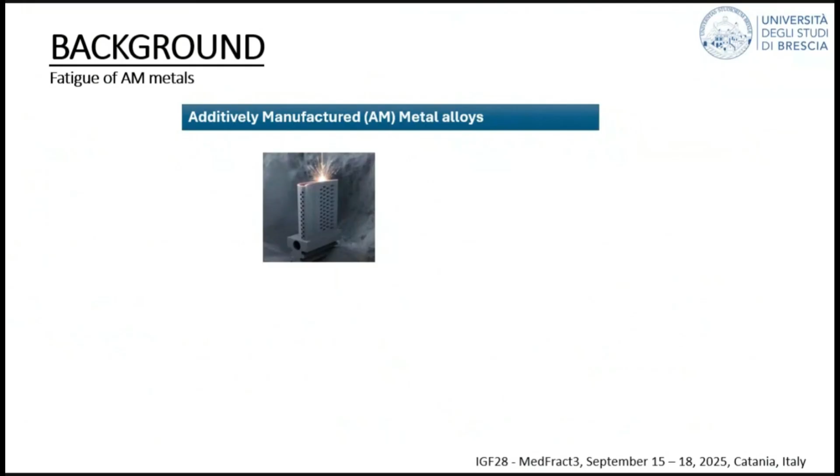The general scenario is that fatigue properties are a critical aspect for structural integrity in additive manufacturing. It depends on the combination of several factors like porosity, surface finish, microstructure, which in turn are dictated by technology. Each technology has a number of parameters that may affect defects, surface finish, and so on.

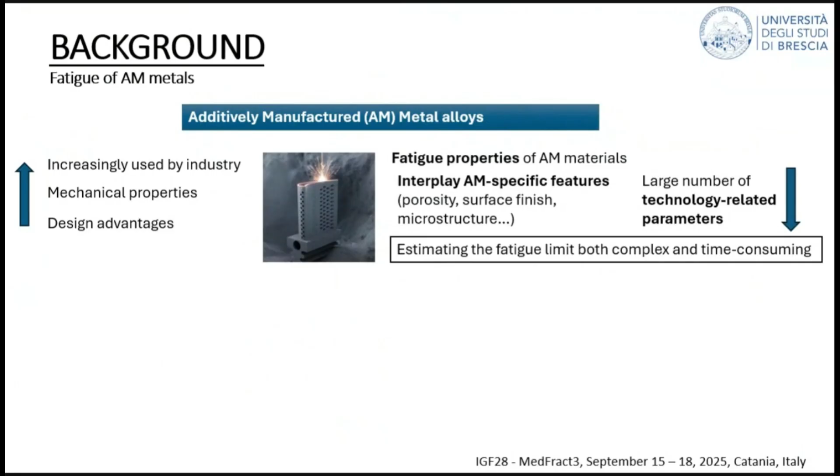In this scenario where we have many technologies, they are still evolving. That means that estimating in a robust way, for example, how parameters or an optimal configuration may affect fatigue can be quite challenging and time or price expensive.

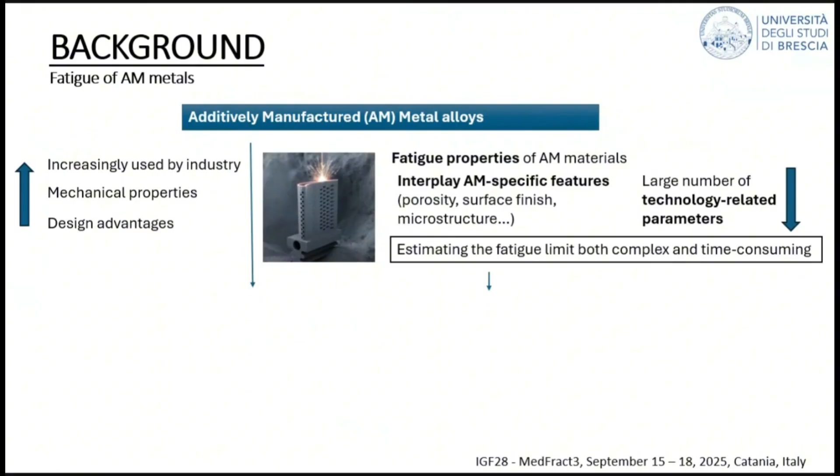This is why it would be particularly valuable to have methods that could predict or at least conduct a screening in a fast way about the fatigue characteristics of the metal. Infrared thermography is one option because we know from previous investigations from different research groups that it has been successfully applied to conventionally manufactured metals, also polymers and composites.

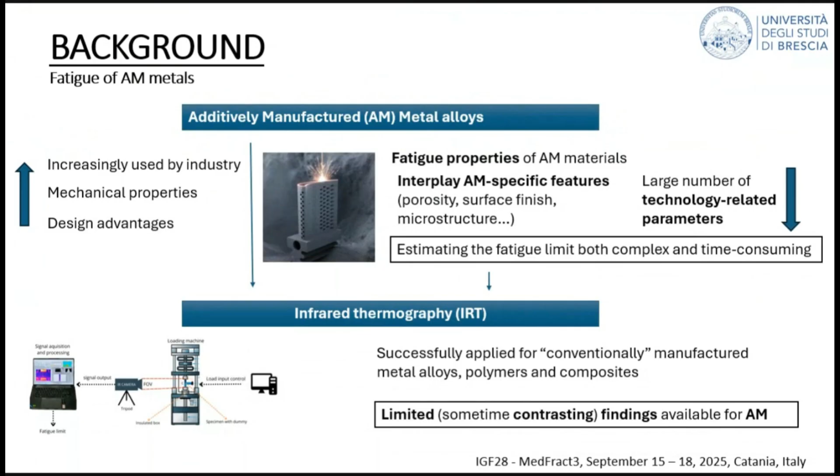For AM materials, there are some published studies. Some reported good quality of the prediction, but in some cases, some contrasting findings were reported.

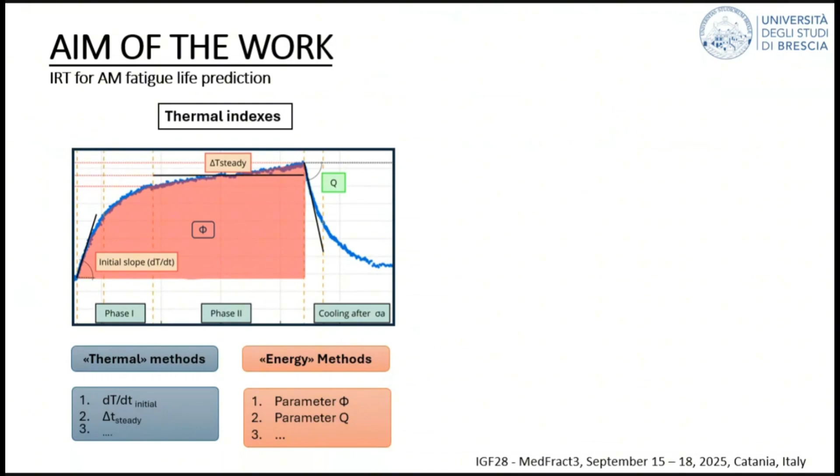The other aspect that we tried to investigate was whether some differences may exist when applying different thermal indexes that can be obtained from characteristic measurement of the temperature during the test, and whether the different strategies used to predict the fatigue limit may also have an influence on the quality of the prediction. That was the background and motivation of our research.

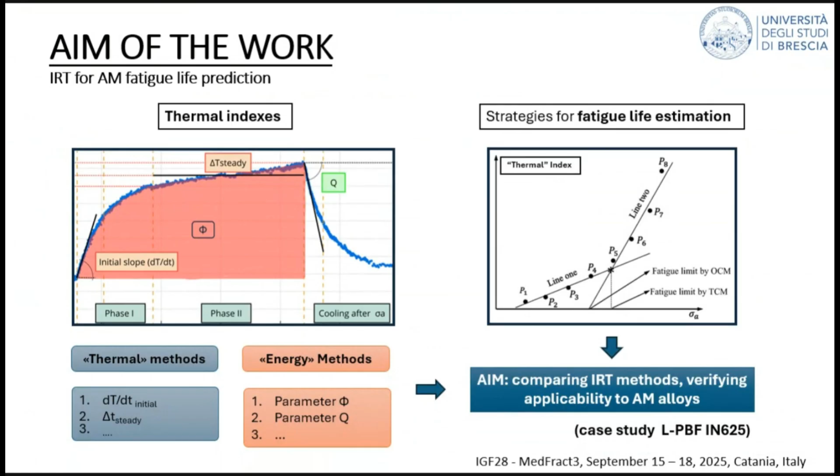As I said, we applied a case study. We had samples from a nickel-based alloy, laser powder bed fusion Inconel 625, and this material was available under 4 different heat treatment conditions.

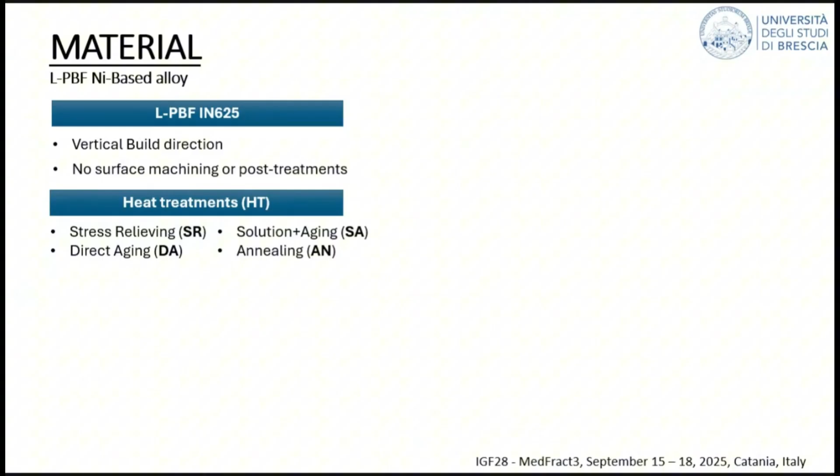This was part of a previous investigation. We know that each condition has not only a different microstructure, but very different mechanical properties. The effect of these heat treatments was to change significantly Young's modulus, the yield strength, and the elongation at break, so we have a family of different mechanical behaviors starting from the same initial condition.

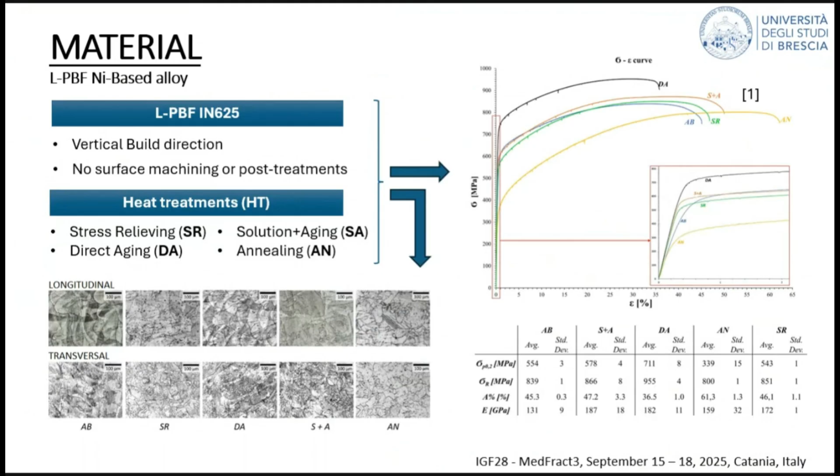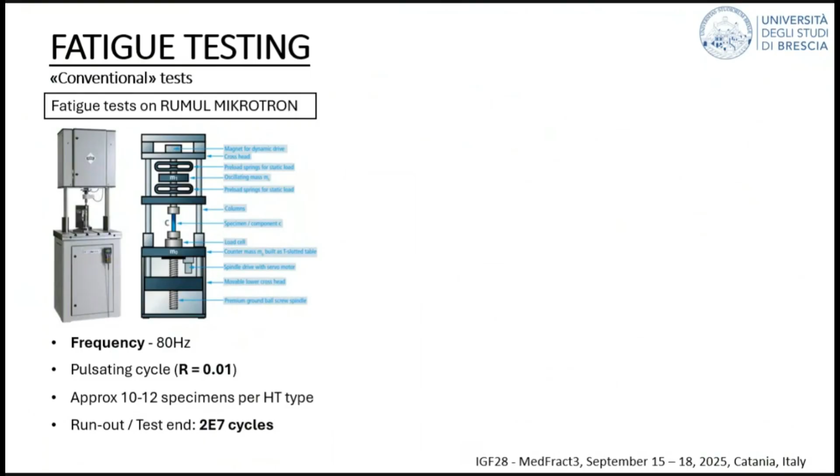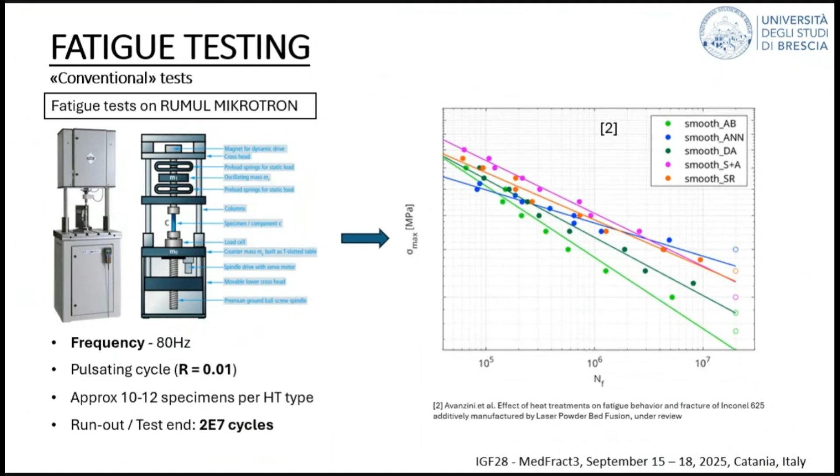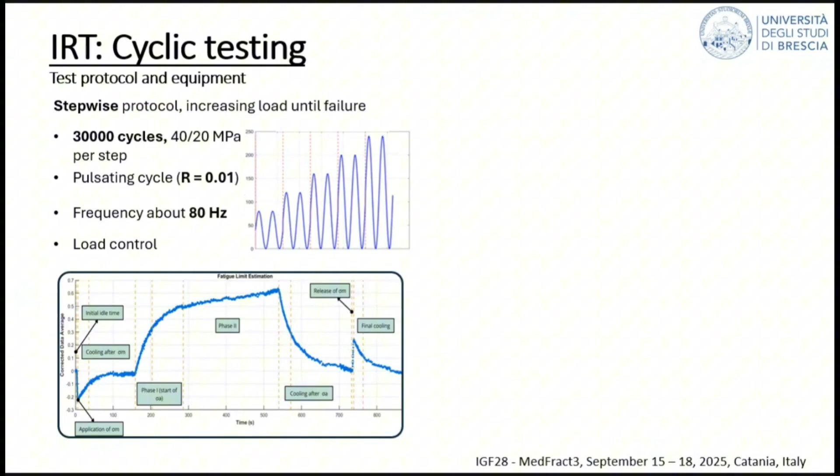Moving to the tests carried out in this research, we adopted a so-called stepwise protocol. We had the sample and applied sequences of block loading consisting of 30,000 cycles, with the sequence of load increased up to failure. This is an example of the type of curve we obtained from the testing.

These are just some details about the setup. We have a standard infrared camera with a microbolometric sensor, and we spray the sample with paint having a known emissivity, and place a dummy sample close to the test one to have a reference for potential environmental changes.

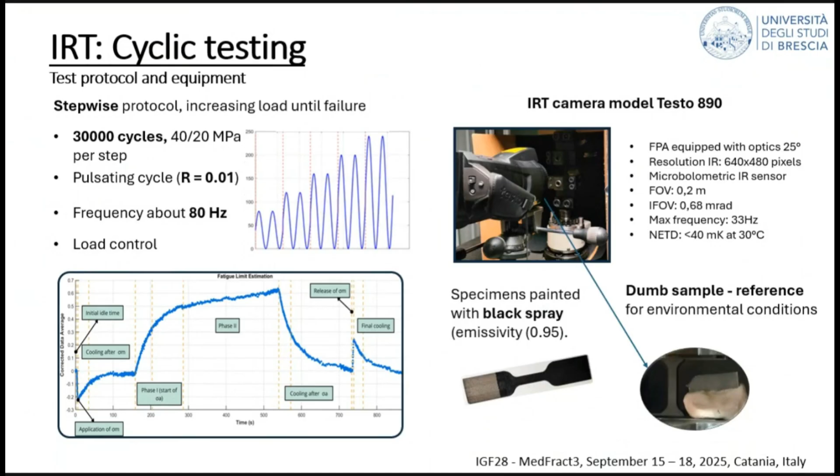We set up scripts in the LabVIEW and MATLAB environment for acquisition of the thermal images and customization of some aspects of processing, in particular two corrections.

One is that when we pointed the camera on the equipment, we found there was a slight mismatch in temperature between the upper and the lower grip. It's not much in terms of Celsius degrees, but in some cases the temperature variation we measured was very small, so we corrected for this gradient and for environmental effects when necessary.

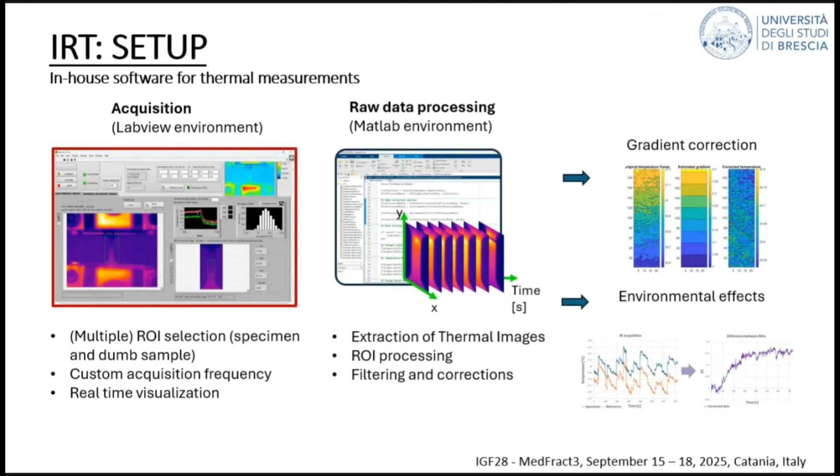Here you can see just an example of the curve that we got from the experiment. This is the average temperature on the specimen, and we subdivided the curve into 4 main phases.

So the first one is the application of the mean stress, then the application of the cyclic stress and its release, and finally the release of the mean stress.

In general, in the central region of the specimen, the temperature was rather uniform, except for the final phase, when at a high load level we reach the failure. In that case, you have here an example of the classic temperature distribution that we've got.

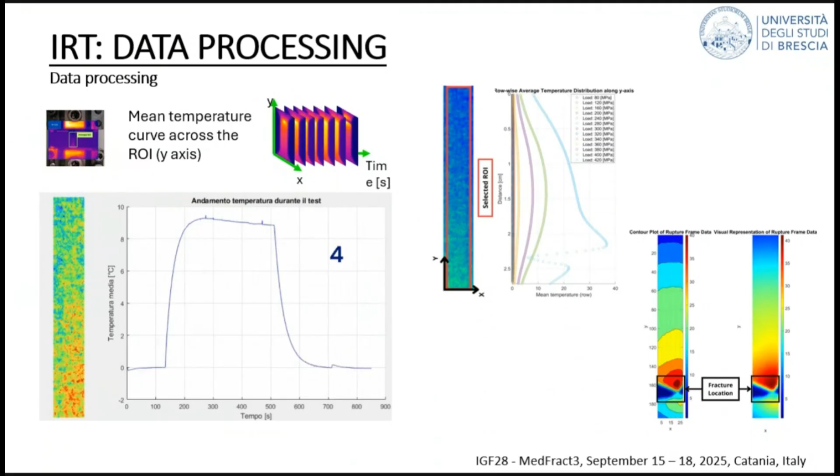Now, from this analysis, we extracted some thermal indexes. There are multiple options in this field, but in particular we focused on the initial slope after the beginning of the cycle, and on the so-called steady state temperature.

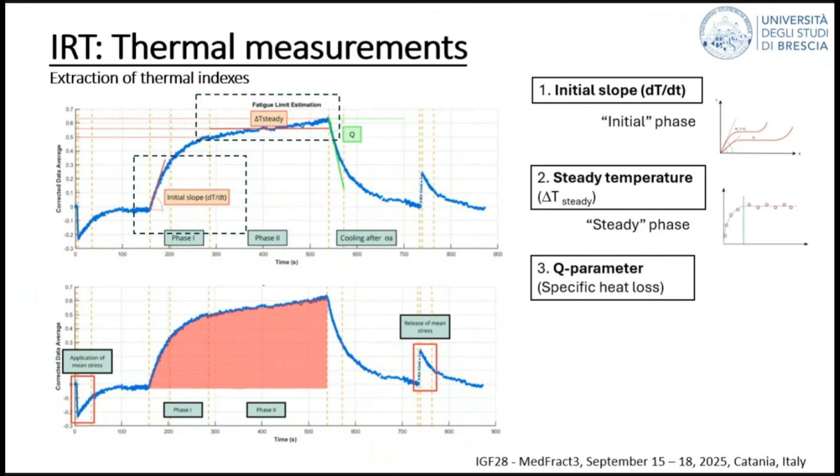Then we extracted the Q parameter, which is related to the specific heat loss, and it can be measured by measuring the slope of the curve when the cycling loading is stopped. Then we measured the area below the curve to extract an energy parameter.

You may have noticed that at the beginning and at the end of the test we have these two spikes in the temperature. These are related to the thermoelastic effect when we apply the mean stress and when we release it, separately from the cyclic loading at the end of the test.

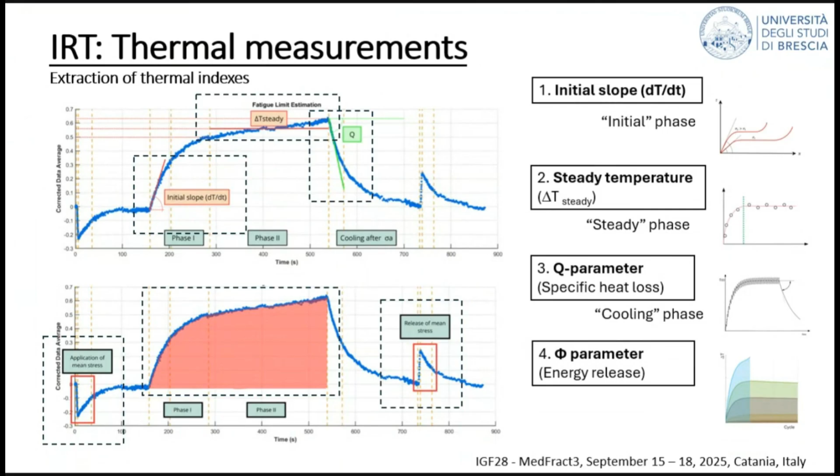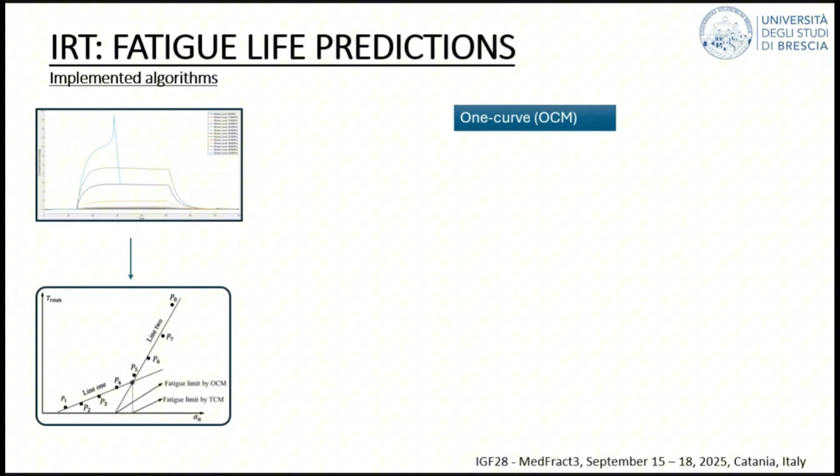Now, having all these thermal indexes, we follow what is usually done in the literature. They are most often plotted against the applied stress, so what you get is a diagram which qualitatively looks like this, where you have two main regions.

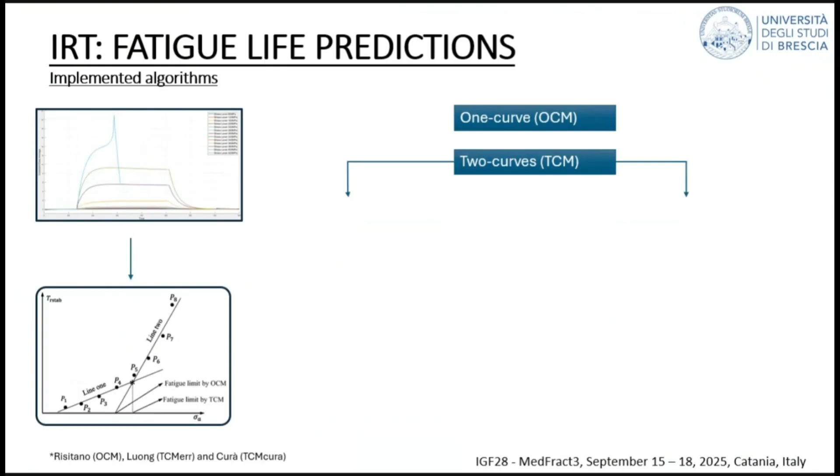There are different strategies that you can use to identify the fatigue limit, which is associated with the transition from the first region to the second one. There are different methods in the literature.

We focused on the first one, which is the one-curve method, which essentially does not consider the first part of the test results and focuses only on the area where the thermal index varies more significantly.

And then there are the so-called two-curves methods, which can be implemented in different ways, but basically you fit both parts of the diagram with different lines.

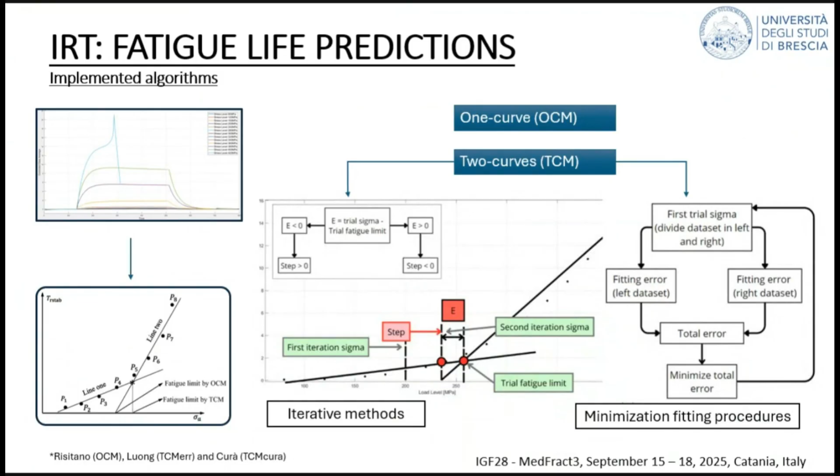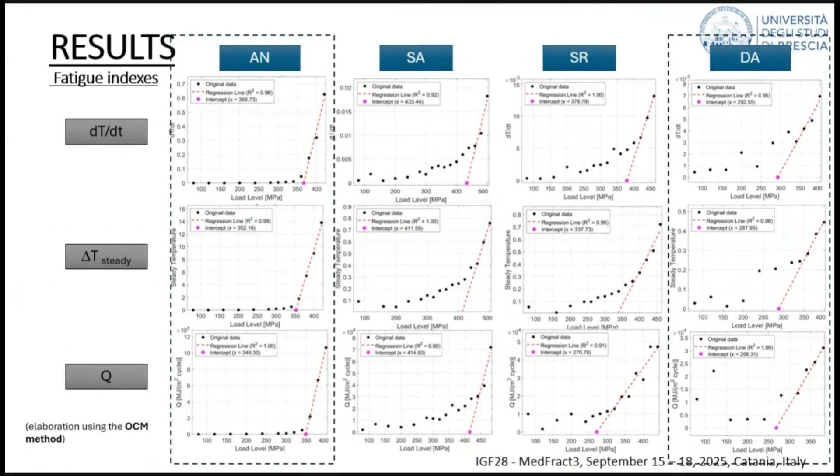And that is important because it's possibly an indication that the method can work for additive manufacturing also. The second observation is that the curves change depending on the material condition. For example, the annealing condition shows a different type of response compared with direct aging, which is a very different heat treatment. So the second indication is that the method is actually sensitive to the material condition.

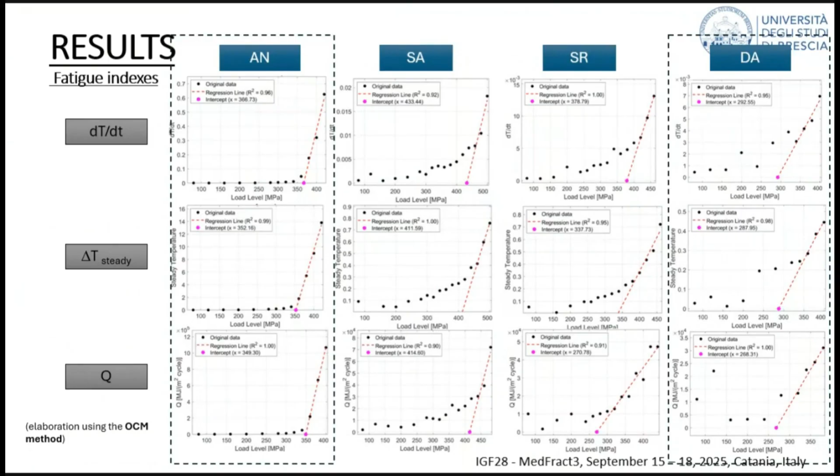Except for one case, the stress relief condition, we get very consistent predictions. In all cases we have this transition at a characteristic level, so it was possible to identify a fatigue limit. Maybe the only difference among the three indexes is that when we apply the steady temperature, the standard deviation is more favorable.

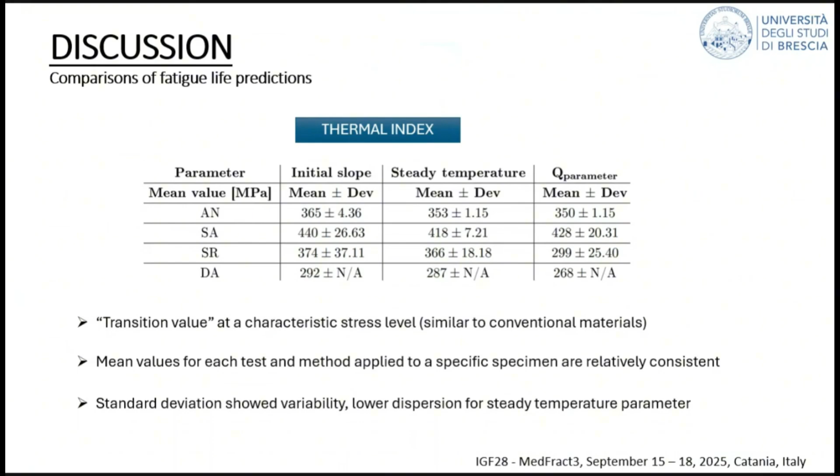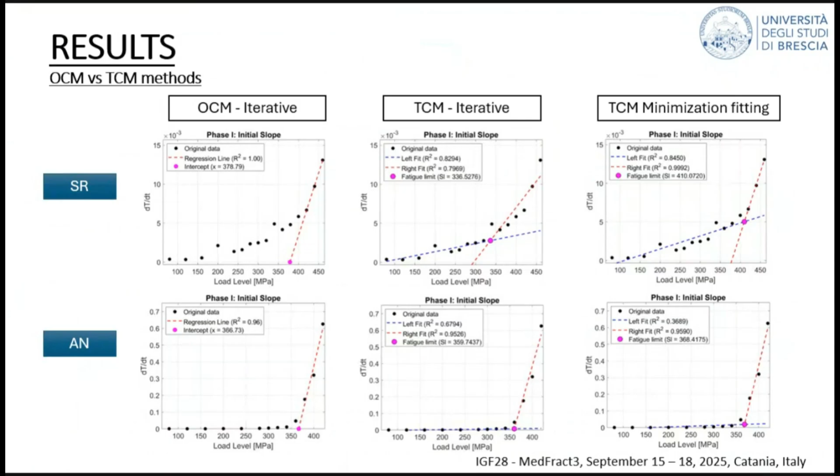So the second type of comparison was among the fitting methods. Here we can see an example for the stress relief against the annealing condition. What we can see, especially if we compare the numbers, is that if we take an average value...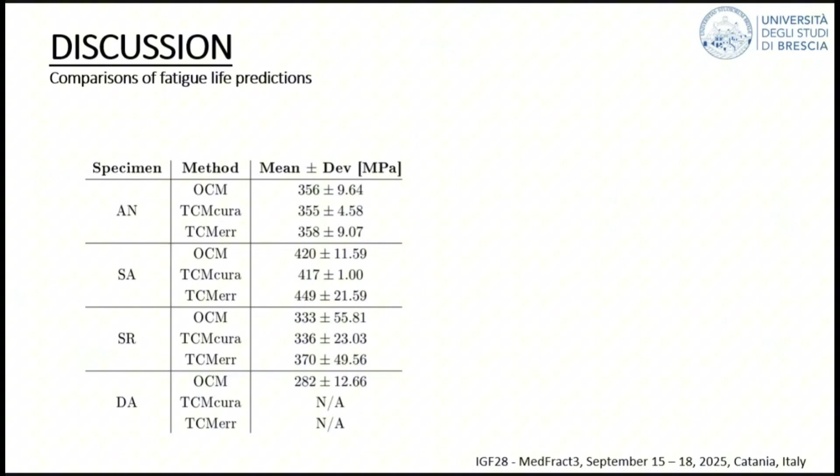...considering for each fitting strategy the mean result of all the thermal indexes that we have investigated, again there is no clear difference between the various fitting strategies. At least in this case study, this was not a really significant parameter.

Now, in this slide I would like to show you maybe the most important comparison, between infrared thermography prediction and what we have got from conventional testing. In the first column you can see the range of values that we have got from infrared thermography, considering all the thermal indexes and all the fitting strategies.

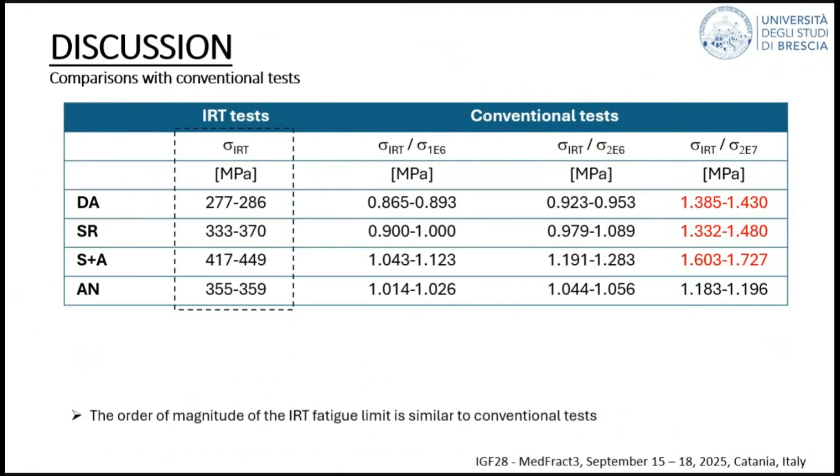Then you have the second and third columns. This is the ratio between the value that we predicted and the fatigue strength that we estimated in case the test is stopped after one million cycles or after two million cycles.

This number of cycles is what you often see in literature for this material. For example, we had this Inconel alloy data at 2 million cycles from the literature. If we consider these values, the ratios are in most cases close to unity. In some cases we have differences of 5 to 15, maybe 20%, but I think it's reasonably good.

What is very different is what happens if you compare the prediction with infrared thermography at 20 million cycles. Because in reality, in some cases we had failures for load levels, stress levels, lower than the predicted fatigue limit.

So this was a puzzling result, but we tried to explain it with two different aspects. The first is that if you test at 20 million cycles, you are testing the material with low stress, so the thermal response you activate will be limited. You will face very small thermal variation, very small temperature variation, so it's more difficult to catch this accurately, or maybe it could be a limitation of our setup.

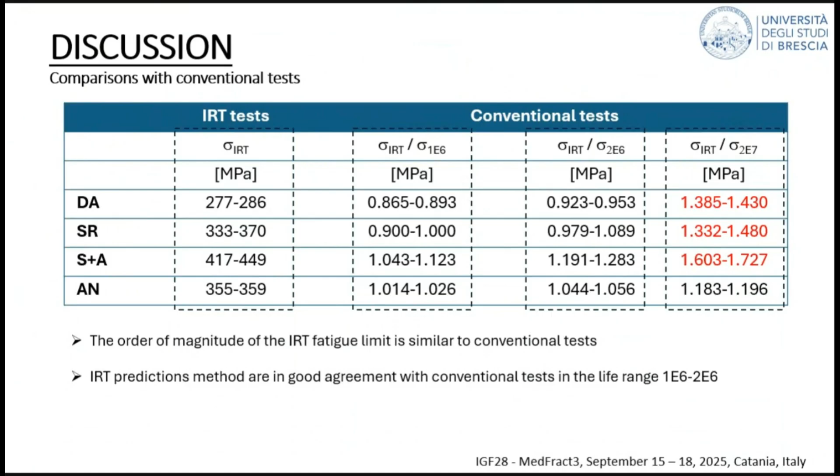If you assume this postulate is true, you can plot a stress-life curve and compare it with a conventional one, which I did not report here. Again, you have good correlation for high stress, and the two curves generally diverge when the stress level is low.

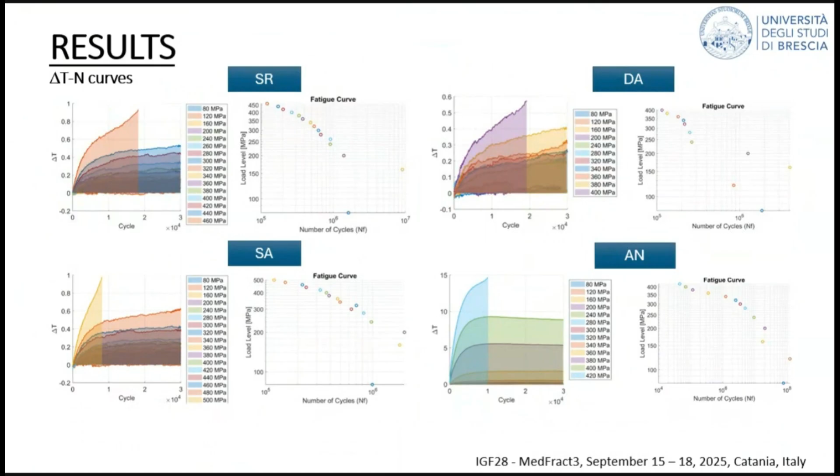I'm approaching the conclusion. I don't know if I have time to show you this final slide. You may remember I mentioned at the beginning that in our test protocol, we applied separately the mean stress and the cyclic part of the loading.

At the beginning and end of the test, you have these two spikes where you have essentially a thermoelastic effect. One question we wondered was, can we see any difference before and after the application of the cyclic loading between these two peaks? Because the idea is that if you're actually damaging the material, maybe comparing what happens when you release the stress with what was happening at the beginning of the test could give a first indication, a warning, that the material is getting damaged.

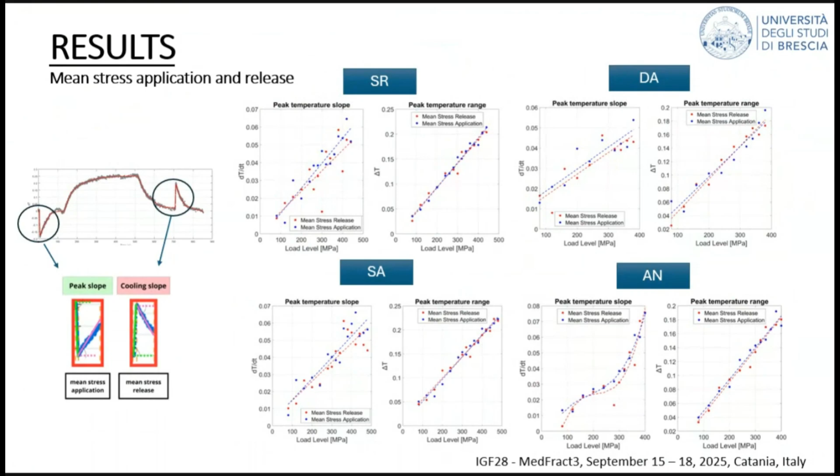At the moment, this slide is just more of a question mark, because we plotted the results for each test, and in some cases there's apparently a trend. In some cases there's a difference between the finishing phase and the initial phase, and this difference depends on the stress level, but I would say it's probably too early, or we don't have enough data to draw a definitive conclusion.

To conclude my presentation, my basic message is: on one end, we have found that infrared thermography can be a valuable tool for fast screening among different conditions of material—for example, varying parameters to get a quick assessment of the most favorable condition. On the other end, we are facing some limitations that we think are related to the presence of defects in additive manufacturing materials, so that the prediction, especially for high cycle numbers, is not perfectly good.